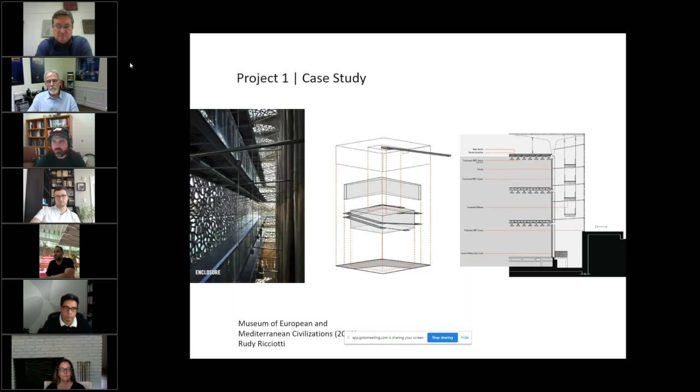And then the students both look at the existing architecture, and then they do a series of analysis diagrams. It's important for me on the architecture side, not only that they understand the material of precast concrete, but that they also understand how the use of that material may relate to the overall project design. So the students do structural diagrams and things like that, but they also are asked to do enclosure diagrams and parti diagrams so that they understand the relationship of the material, how it's fabricated, but again, relative to the overall design concept.

The structural engineers work with the architecture students on this in terms of answering questions that they may have and understanding how the structure for the precedent may be done. Some of the work is done through drawings when we have them, but also construction photos and things like that.

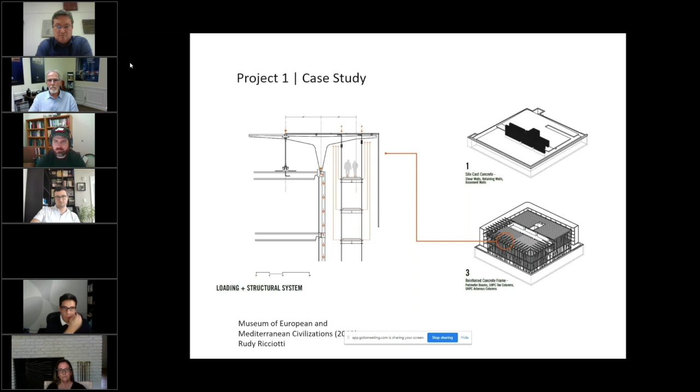As part of the case study, it's important to me, and I guess the way that we teach the studio, for the students to understand how something is made can tell you how it can be designed. So the students actually do some in-depth diagramming about the panelization themselves. This particular project, I'm sure many of you are familiar with it, is a vertically cast UHPC panel. So the panels are actually two-sided, meaning they've got two finished faces.

So each panel iteration comes with a front and back face that can be used. And the students start looking at how do you maximize repeatability, but balancing that with the architect's sort of inherent desire for uniqueness.

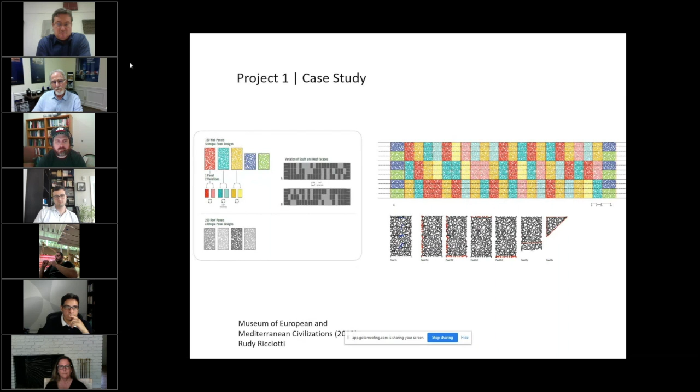The students are also asked to do models of parts of the precedent component, and they're actually asked to replicate the fabrication of the model and of the casting of the panel similarly to how the precedent was done. So in this particular case, there was a rubber mold used, and so you're seeing they CNC'd out a master. They then cast a rubber mold. They then took that rubber mold and oriented it vertically and then cast the piece into there.

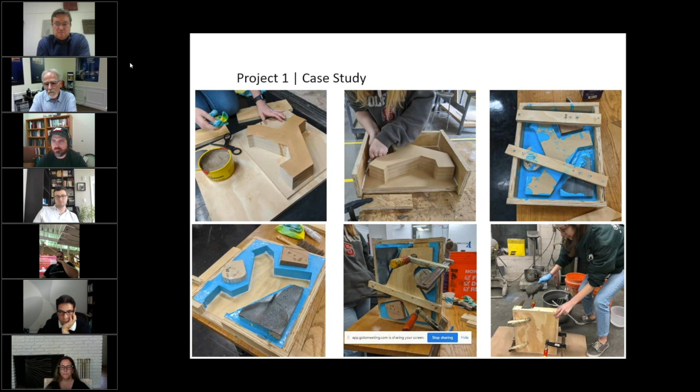So you're actually sort of seeing the students go through the step-by-step process for their case study so that they can actually sort of understand that fabrication process. As I said, we also are able to go to GATE. So we have a GATE precast tour, and we're able to see their facilities there and how large the pieces are. We're seeing them on the truck, out in the storage yard.

And then we have US Formliner that also comes to our materials lab. And as you can see, there's Ray there showing to our students how rubber molds are cast. The students for their second project do a full-scale casting and testing assignment. This has been done so that the students can work directly with the materials at hand. Our students in general, both the engineering students and the architecture students, really like working at full scale and full size and getting their hands dirty.

These are the two panels that were done this year. The project for the building design is given to the students before the panels are designed. And so the students are actually asked to design panels that would be in reflection of the design for the full-scale building. This particular year, we asked the students, they were going to be designing an extension to the College of Design here at NC State.

And so we here at NC State in the College of Design have a very rich history of being associated with the Bauhaus in terms of an education model. And so the students went and looked at early Bauhaus drawings as a way of starting to figure out how to articulate the architectural precast panels of this. So these are the two sets of panels that were done.

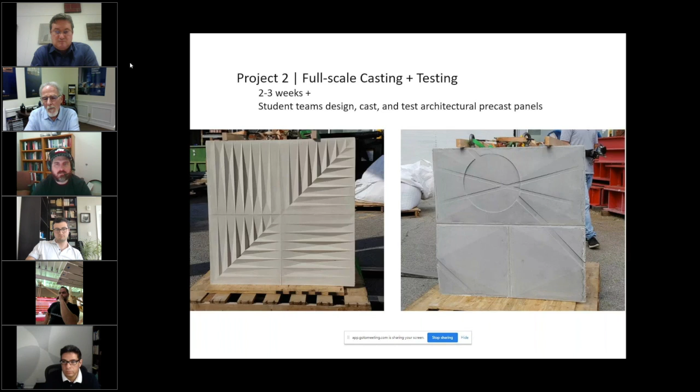As part of this project, the students actually go through and they make their molds. Generally, they've been doing it with a CNC machine, and then they use Formliners cast by rubber provided from US Formliner. So they go through the mold prep, the sanding exercise, the waxing of it, the casting, the stripping, the tessellation of the pattern. And then on the left, you can see us at our materials lab at the College of Design. And the students are all very excited to strip their rubber from the molds.

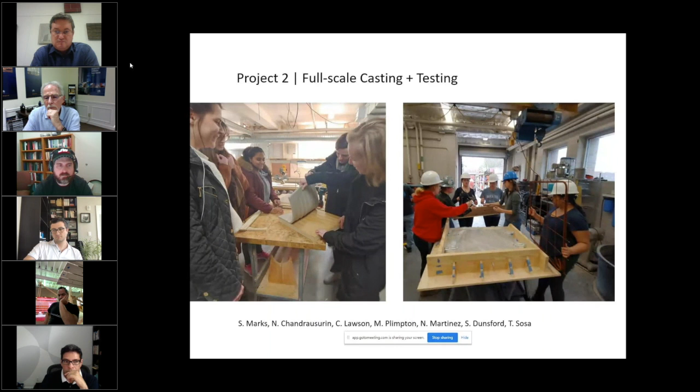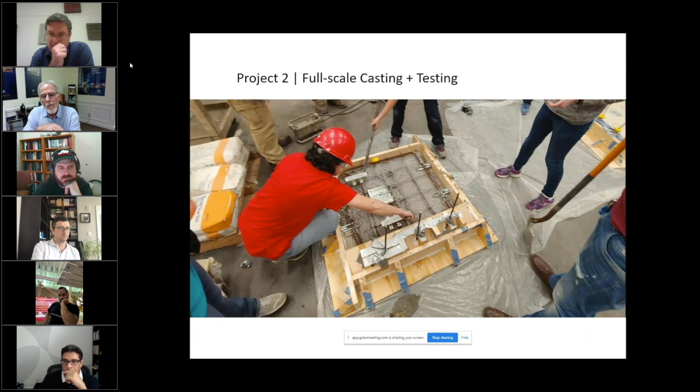And then on the right-hand side, you're starting to see them get ready to cast their panels at the Constructed Facilities Lab and starting to lay out rebar and things like that. So they actually place the concrete. You can see all the connections embedded in the pieces, both on the side connections for stripping, but also in terms of lateral and bearing connections, placing of concrete and going through and vibrating it. So they're going through all of these pieces as part of this. And then going through and stripping.

So this is where we were at essentially right before spring break. And so generally what we do at this point in time is that we actually ask the students to use the mold a second time. It doesn't have to be a one-to-one relationship between the mold design and the panel. So most times the molds have been tessellated in some sort of way.

And both sets of teams were challenged to turn a corner with their design. Both sets of teams had actually decided to do a cold joint. And so what you're seeing is the rebar sticking up as to where the other panel would be cast up against it. They do often like to sign their panels.

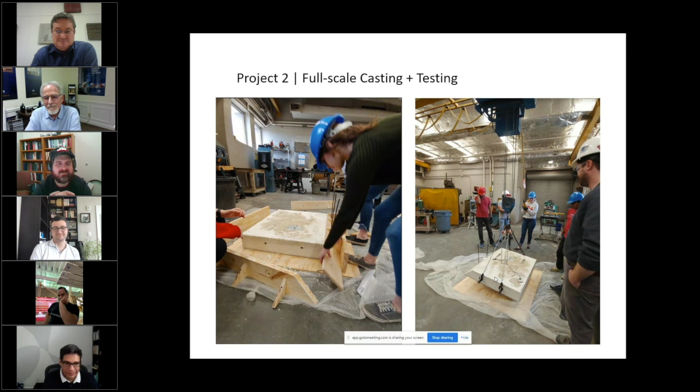And so you see the handprints of each one of the team members in the back of it. And this is as far as we got. So unfortunately, we are now sitting with the panels at the CFL. The students were very proud of their work. They're currently, I think, still sort of sitting outside.

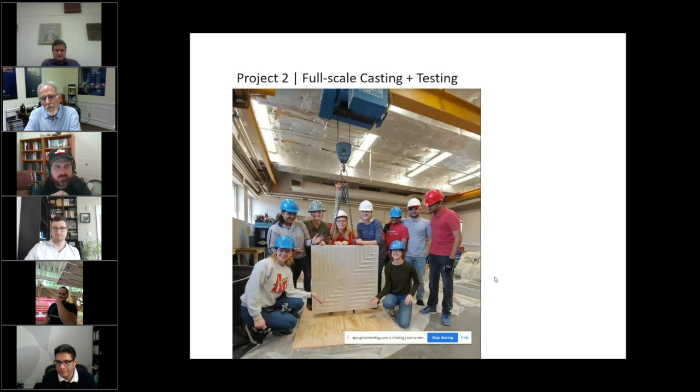Our hope had been that we could get some of them to perhaps do the second panel during the summer, but that probably doesn't look likely. But the panels themselves, I think, turned out really nicely, and we're hoping to figure out how we may actually finish them up as part of this project.

The final project is the building design. It's 10 weeks, and it's individually done by the architecture students. Our campus, in terms of the College of Design, is located in these three buildings. We've got Brooks Hall, which is the main building, Kamphoefner, which is the newest of our buildings from about 1960. And then we have Leazar over here on the other side of the road.

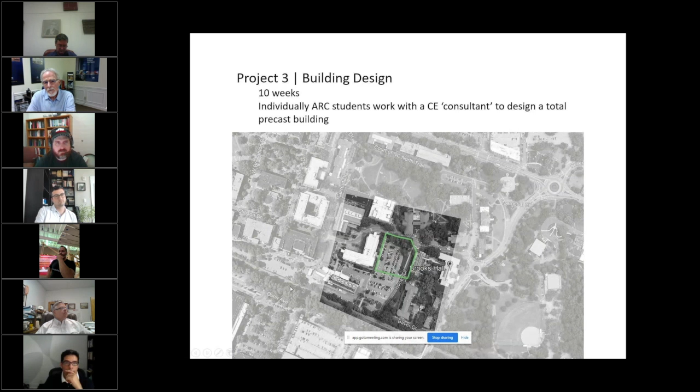So you can see next to us, we have an open parking lot. This is actually the low point of the campus right here. And so this parking lot essentially acts as the drainage channel for almost everything that is in the highlighted rectangle. So water is an issue on campus. And so students were asked to think about that in terms of design. And then we have an existing Amtrak railroad track that runs right through the middle of campus right here.

So these are just some of the designs that came out of the studio. We had a little bit of an opportunity right before spring break to work on conceptual design. But essentially from after spring break, we did everything via Zoom. And so we would live comment on people's drawings, and we essentially ran our Zoom course similar to Studio.

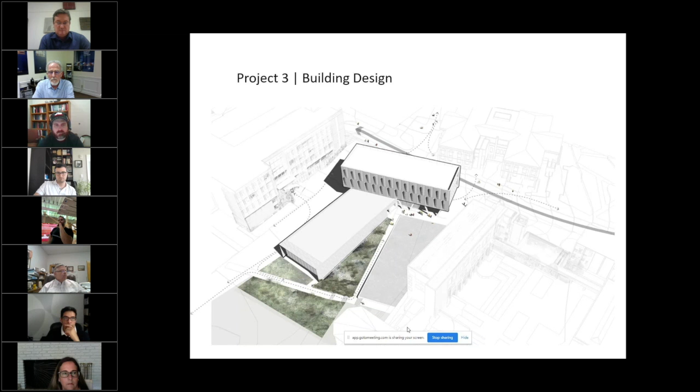So there would be one Zoom call that everybody would listen in on and hear desk crits normally as they would be going. The engineering students would come in as needed during their time. Greg would be there and I would be there. We also commented directly through Annotate. We were able to comment directly on people's drawings.

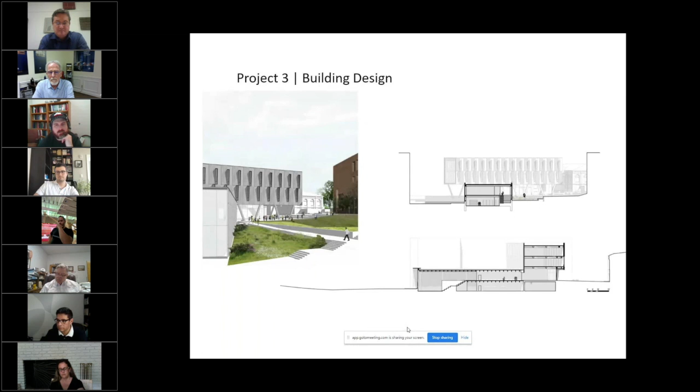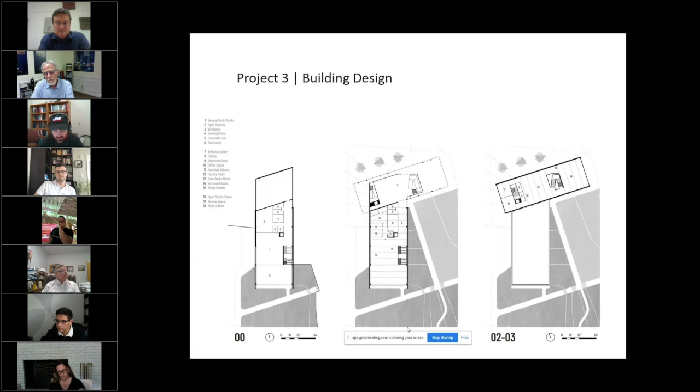So these are just the results. We don't have any models built, certainly, from the studio as part of it. So everything was done in SketchUp. And as part of the studio, we still like to do wall sections and things like that. You still see things like double T's being shown in the plan and in this section so that there is some idea of the structure behind the pieces. And we did go through all the wall sections, working with the students to start thinking about how the projects were going to come together in terms of the detailing at the end.

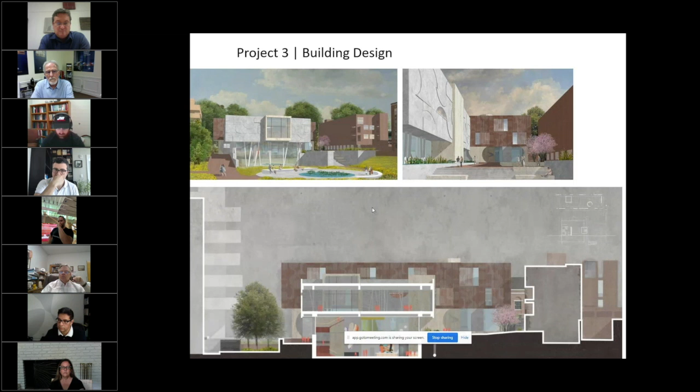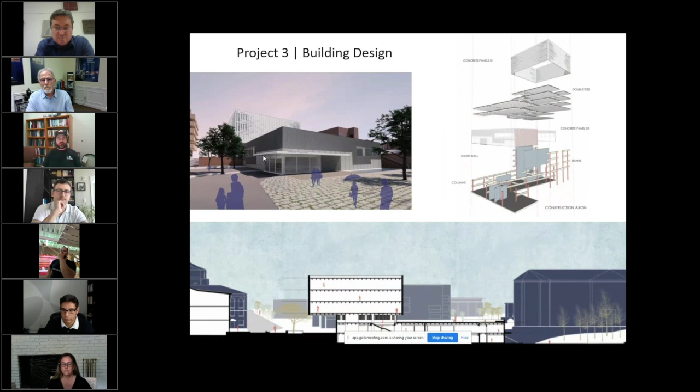This is one of the other examples. Again, you can see here is Kamphoefner and Brooks Hall. And this project mainly came up with two components. There was the studio section, but also a library for the College of Design. And in all of them, there is an architectural panel or a sort of finalization that's being used on the building. So I wanted the students to at least get to some understanding about the architectural quality of the precast in addition to the structural quality of the precast. So that's it.

Be happy to answer any questions. I don't know, Greg, if you had any comments that you wanted to say?

Tristan, we're hearing your rain. Can you mute yours?

So nothing specific to add, but we have the interplay between architecture and engineering, which I think has worked out very well for students in both groups. The engineering students come in with no concept of how any of the studio process works, and frankly, that's how I started as well. So that's certainly not a surprise. But they integrate very nicely with the architecture group, and I think vice versa.

I think eyes are opened up on both sides as to the constraints that each group is dealing with, and that's a fun thing to see and a fun thing to be part of. So I think that part of it especially has been very successful for us.

I will just also add, I think when COVID came through, you're never quite sure what's going to end up happening. But we had a really great group of students this semester who took everything in stride. And even within studio, but even outside of studio, they sort of self-organized and would desk crit each other off of Zoom. And I know that they met with their engineers as well outside of class time.